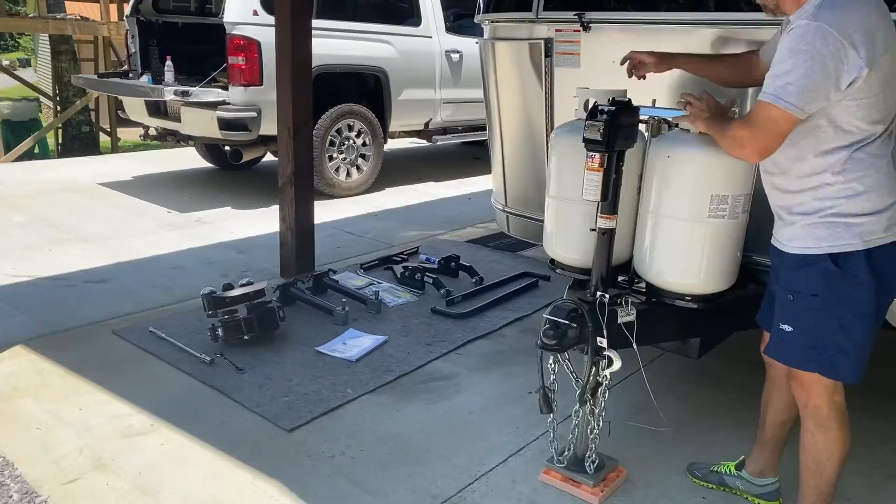Okay, now that you got the propane cylinders removed, this is a good opportunity to fix any chips in the paint, fix any rust, or repair anything that needs to be repaired on the tongue before we start. Being that this is a brand new trailer, it's in good shape, so we don't have to worry about doing any of that. But what we will do at this point is we will establish our measurements that the manual requires us to have on the tongue so that we can do the installation.

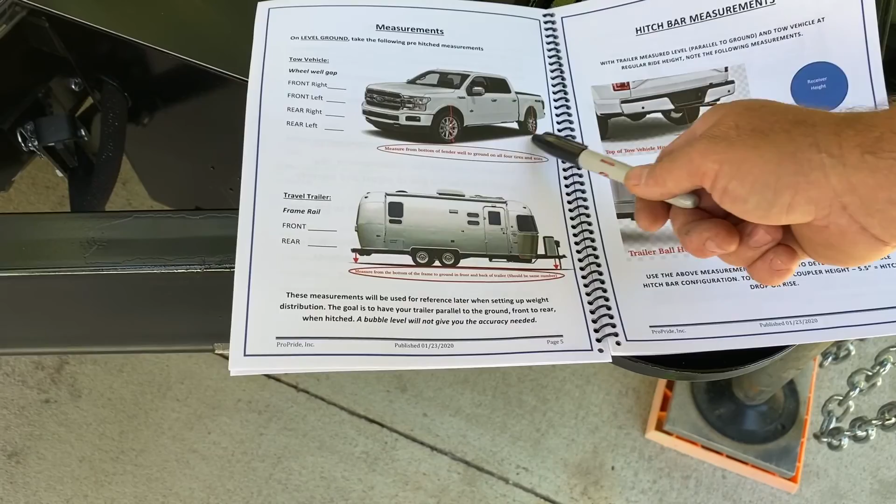Okay, one of the most important things to the installation is to make sure that we get all of our measurements. We're going to need to get measurements on the truck and on the trailer. We'll measure from the back of the trailer, front of the trailer, make sure we're level, and we need to get wheel height all the way around. And it gives us a place in the manual to write all those measurements. So we'll need a tape measure. I'm going to use a Sharpie Magic marker and some blue painter's tape in order to make our marks and give us a place to write those.

We'll also need to get the hitch box height and the trailer ball height so that we can establish the difference between the two in order to set up the stinger bar. So we're going to do that now. We're going to get the measurements off the truck and the measurements off the trailer, but we'll start with the truck.

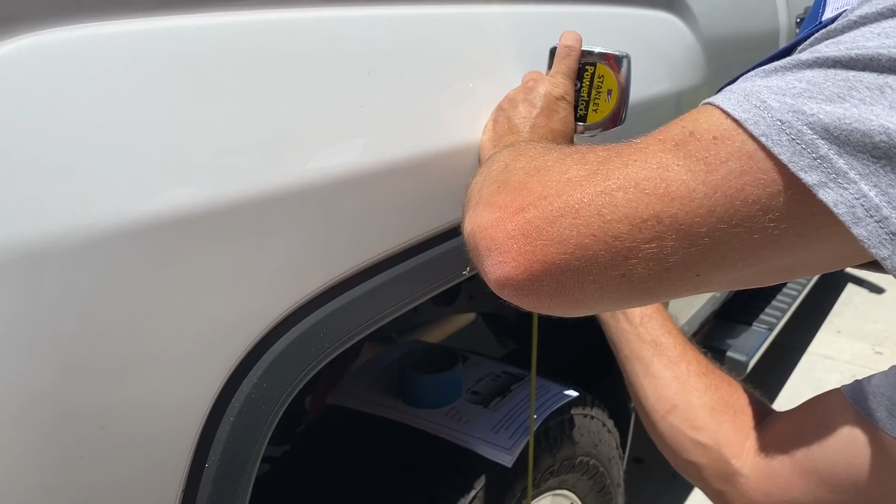All right, so what we're going to do is we're actually going to put a piece of blue painter's tape on the truck, and we'll use that to write our measurement on and a line so we don't have to remember anything. So we're going to measure from level ground to a mark on the truck, and 46 inches. That's what we'll use for that one.

These measurements will be used to set up the weight distribution portion of the hitch after the hitch is installed. We'll be able to tell how much the back of the truck goes down versus how much the front of the truck goes up, so that when we add the weight distribution to it, we can readjust it to get these numbers back as close as we can.

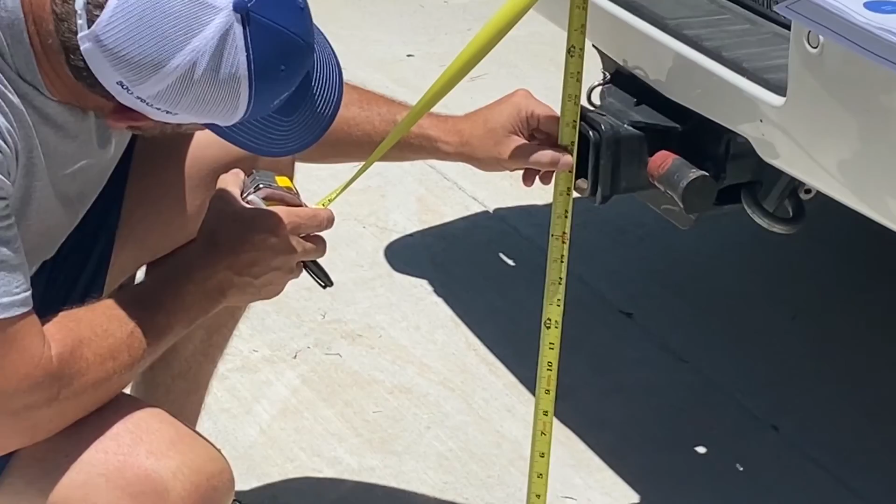All right, we're also going to need to get a measurement from the ground to the top of the hitch receiver here. So we'll take a tape measure from the ground to the top of the hitch receiver, and that measurement looks like it's 20 3/4 inches. So we'll take that and record that measurement in the manual here. It's 20 3/4 inches.

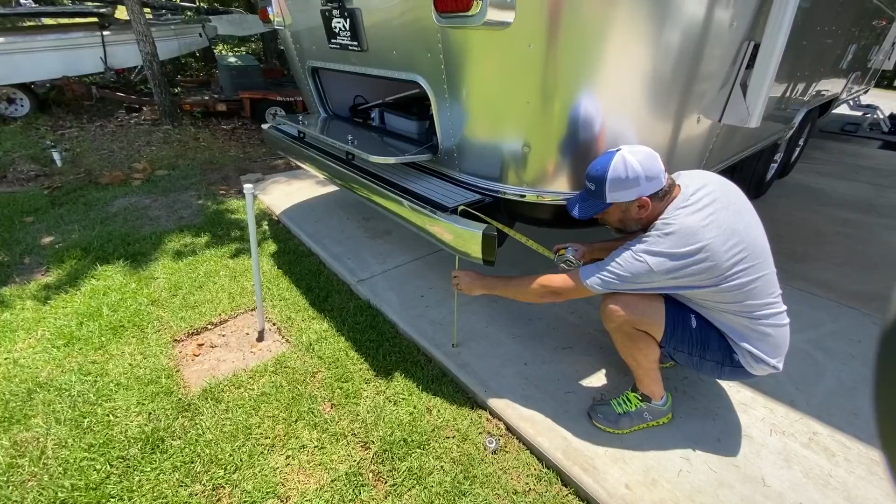Okay, next we need to make sure that the trailer is level. The way we're going to do that is we're going to establish a measurement from the bottom of the frame in the front of the trailer and the bottom of the frame in the back of the trailer. So we'll measure from the ground to the bottom frame edge is 19 1/4 inches in the front. And we'll go to the back and we'll make that measurement again. All right, we're going to check that measurement in the back from the ground to the bottom of the frame, and we have 19 1/4 inches. So those match. That means the trailer is level.

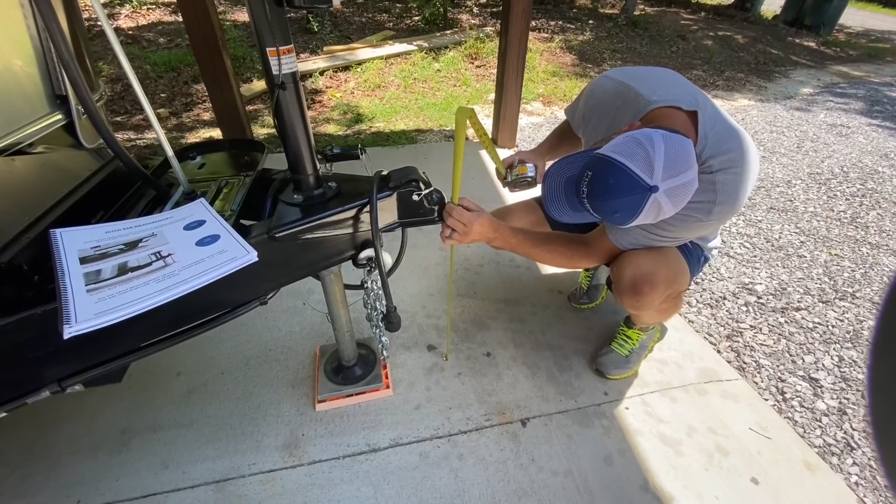Okay, so to establish the measurements for the hitch bar, we've already established that it's 20 3/4 inches from the ground to the top of the receiver. Now we need to measure from the ground to the top of the ball to get the trailer ball height. All right, so from the ground to an eyeball level spot, the top of the ball is 23 inches. So our ball height will be 23 inches.

All right, we're going to talk about the hitch portion of the ProPride setup. A lot of people get hung up on setting up this hitch bar, and it's really not that hard. There's a little bit of math involved in it, and you got to make sure that you've got good measurements to do it. But the first thing let's establish is which holes we use in this bar. This is the hitch side of the bar.

This is the part that actually goes inside the truck, and it can be installed either this way or this way based on your measurements, and that would be considered plates down or plates up. So then what you have is you have two pivot holes and you have two pivot pin holes.

And the way this works is this pivot pin, they recommend starting with 2 washers on it. This pivot pin will always go in the top hole. So if you're installing your hitch with the plates down, it would go in this hole. If you were installing it with the plates up, it would go in this hole. This pin here always goes in the top hole.

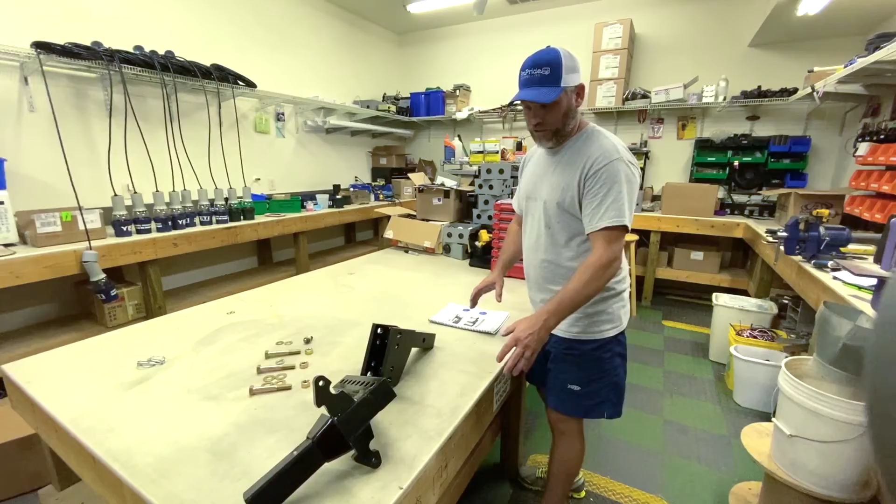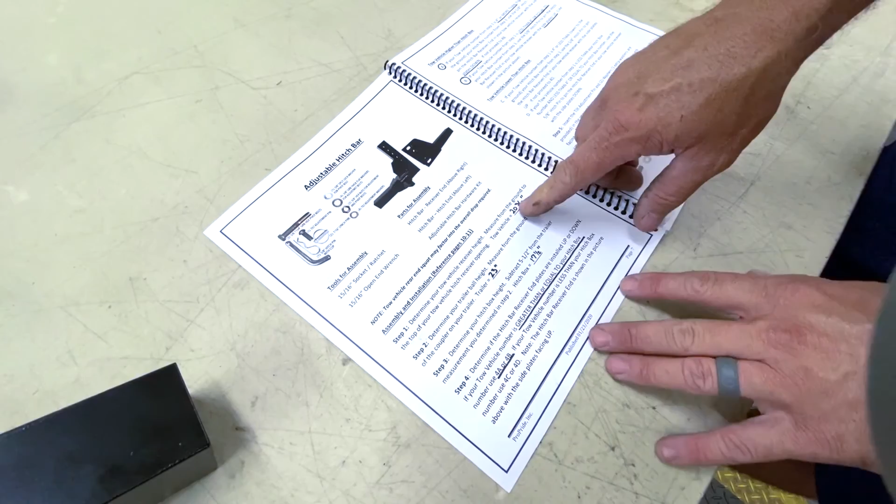Okay, so now we're going to use the measurements that we took earlier to determine whether we're going to install our hitch receiver side with the plates facing down or the plates facing up. So let's look at these numbers. We've established that our hitch height for the truck is 20 3/4 inches and the trailer ball height is 23 inches. And they give us a nice worksheet to work off of here. It says you determine your tow vehicle receiver height, which we have at 20 3/4. We determine the ball height at 23.

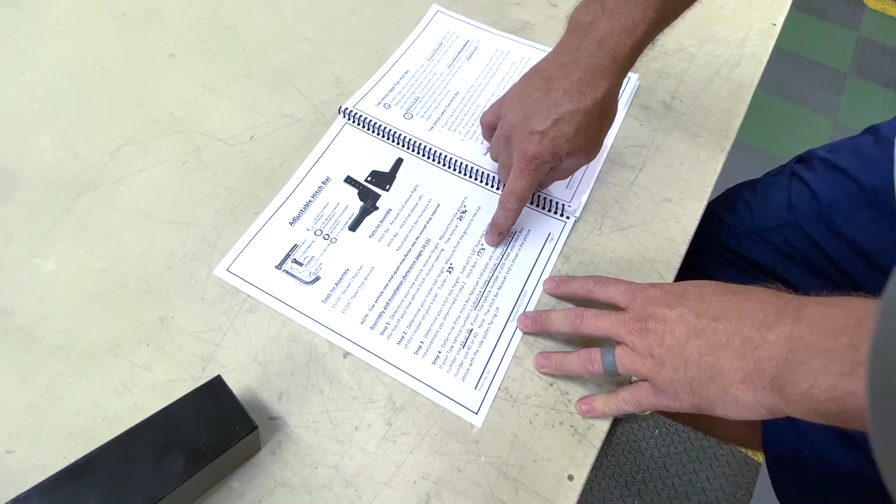The hitch box height for the actual ProPride receiver head is 5.5 inches lower than your trailer ball height. So we'll need to subtract 5.5 inches from the 23 inches and we get 17.5 inches. And then we're going to determine whether that number is greater than or equal to our hitch box height or less than. In our case, our hitch height is 20 3/4 inches. The hitch box height is 17.5, which means we are greater than or equal to the hitch box number. So then we're going to use steps 4A and 4B.

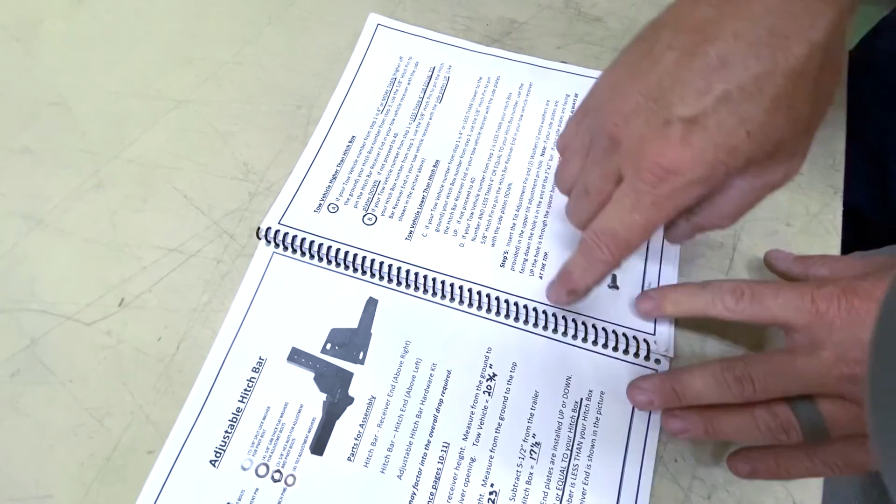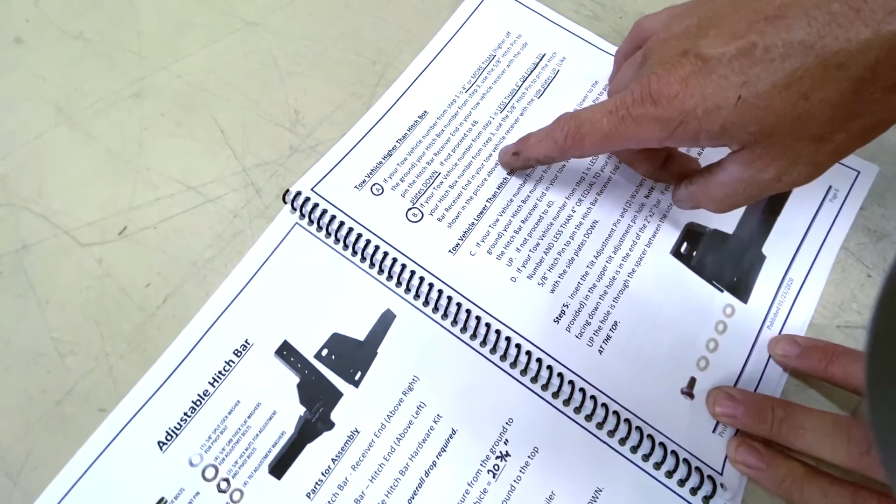So we come over here, this is step A, and it says if that difference in the number is 4 inches or more, then we're going to place them with the plates down. If it is less than 4 inches, we're going to install it with the plates up. So if we subtract 17.5 from 20 3/4, we get a number of 3 1/4 inches. So 3 1/4 inches is less than 4, which means that we're going to install our plates in the up position.

Okay, so we've determined that we need to install our hitch receiver with the plates facing upward. So I've kind of got it mocked up here how it's going to go, and what we're measuring is that 3 1/4 inch difference. From the top of the receiver we're going to establish a straight line here and then to the top of the stinger. We want to check it, and we're right at 3 1/4 inches there. So these would be the holes that we would use.

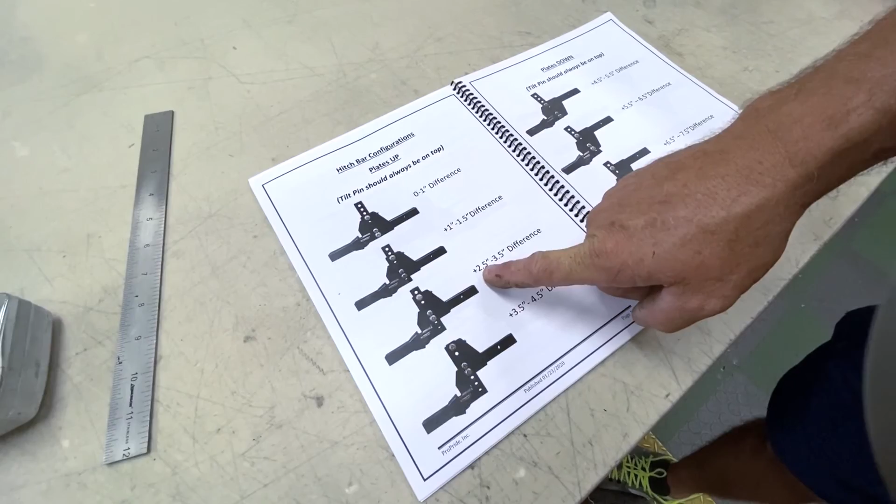Now this can also be established by a guide ProPride has given us, and we knew our difference was 3 1/4, which falls between 2 1/2 and 3 1/2. And if you look, the picture will show you exactly where the bolts go. So it looks like ours is plates up with 1 hole exposed at the top.

Okay, so let's install these two together. So again, remember, this pivot pin always goes in the top hole. We're installing ours with the plates up, therefore the pin goes in the top hole here. Now, we'll slide these together. The pivot bolt goes in the bottom hole. And we're going to slide it up so that we get our 1 hole exposed here at the top. And then we're just going to put it together.

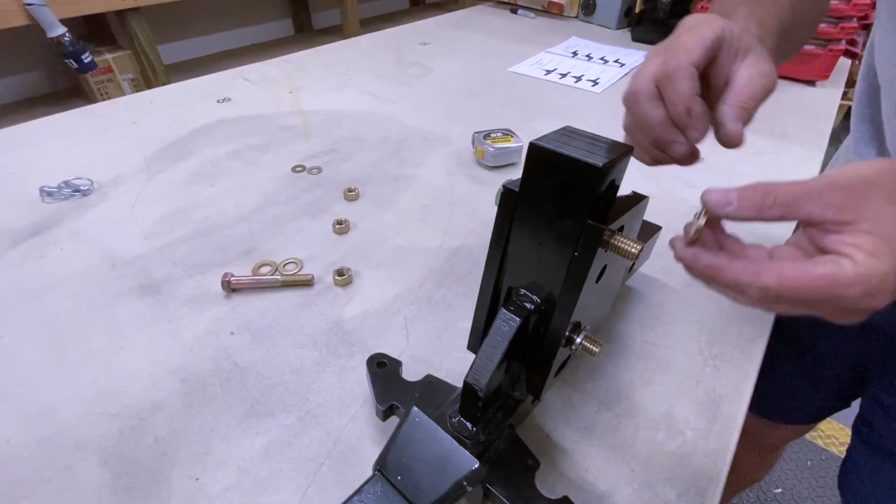There's a washer that goes on this side. A washer that goes on this side. And then the nut. There. And then the bottom hole. There's a washer that goes on this side. A washer that goes on this side. And then the nut. Okay.

I'm going to show you what this pivot pin does. When we apply weight distribution to the hitch, it'll stop the hitch from continuing to pivot upward. So this can be adjusted to change the angle of the stinger. But right now they recommend 2 washers, so that's what we've got in there. So we'll get all of this tightened up, and then we'll be able to put this in the back of the truck and determine if the stinger is level with the ground or not.

If it is aiming in the down position, we would need to take a washer out. If it's in the up position, we want to push it back down. We may add a washer here. But this is just a rough guideline to get started. We use 2 washers.

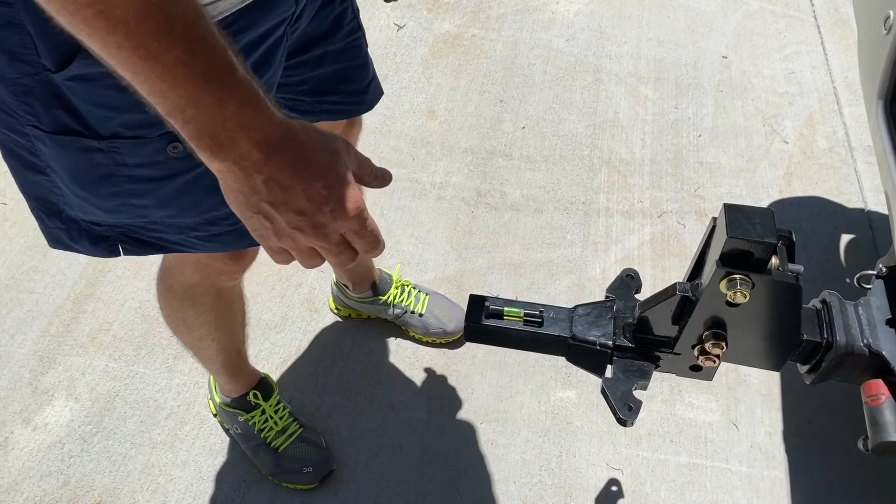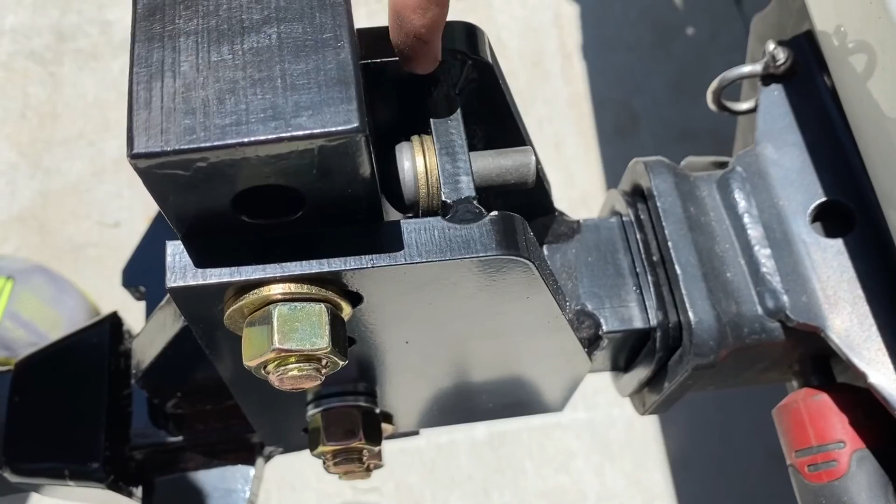Okay, so once the hitch is on the back of the truck, the ultimate goal is for this stinger to be level. So what you'll do is if you pull up on it, it should be close to level at this point. And that would be where these washers that are on this pivot control pin here come into play. The number of washers you have there will affect the angle.

So right now we're going to leave it where it is. We may need to fine tune adjust it later, but it's close to being within the lines. I don't think the truck sits level without any weight on it anyway, so we'll have to look at it once we get everything in place and see how it looks.

Okay, let's do a recap of what we've done so far. So we've established our measurements all the way around the truck. We've established our measurements on the trailer, establishing the hitch height, establishing the ball height, using the manual to calculate our measurements to determine where we needed to be as far as mounting the stinger to the hitch assembly. We've got that done.

We've got everything snugged up. It's not super tight at this point, but it's firm enough that it won't move. We'll tighten everything else up once we make final adjustments. Okay, so now what we're going to do is go back over to the trailer and we will mount the weight distribution jacks and the frame bracket.

Okay, so we're going to establish the measurements for the weight distribution jacks, which will mount to the frame. That measurement is 26 inches along the A-frame from the center of the ball to our 26-inch mark. We'll have plus or minus an inch and a half. So there's a 3-inch window where that jack can go.

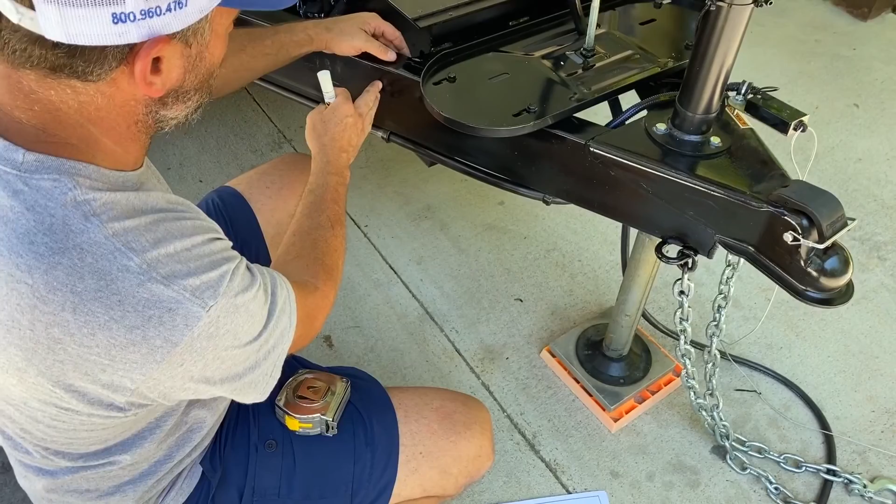The reason it needs to be within that 3-inch window is because you want it pulling straight up and down on the weight distribution spring bar when you raise or lower it. You don't want it way back here where it's pulling at an angle, or way up here where it's pulling at an angle. So what we'll do is we'll establish the 26-inch mark here, and then we'll have to determine where it falls in line with our propane tank cover to make sure we don't have any interference between the jack and the cover. So let's get our mark here.

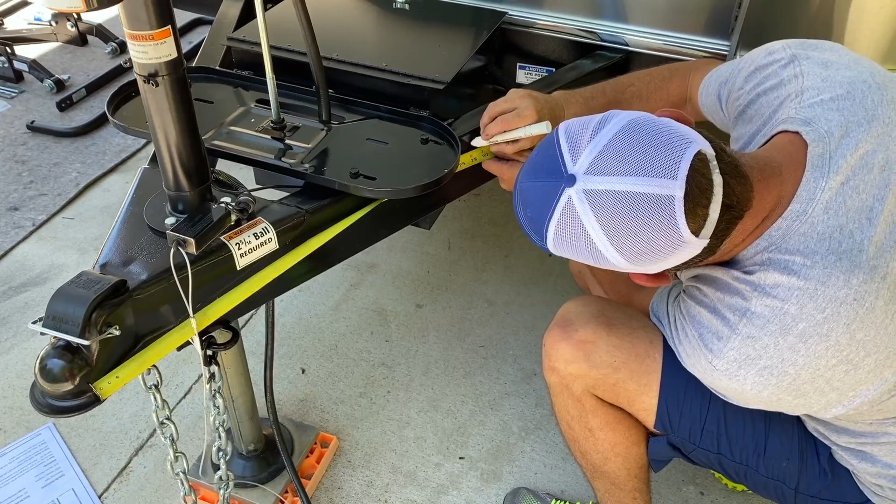We'll find the center of the ball. We'll come back to 26 inches. Make a mark, and then we're going to go to the other side of the trailer. Do exactly the same thing, finding the center of the ball. And 26 inches.

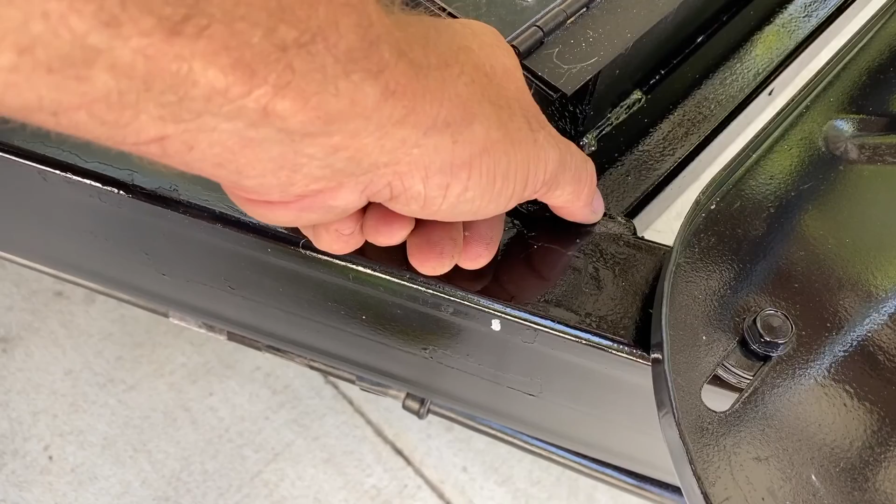Okay, so we've established our 26-inch mark here, and I can already see we're going to have a little bit of an issue because the cross member for the battery box falls within that 26-inch mark. But remember, I said we had plus or minus an inch and a half, so we can go an inch and a half back. Obviously, we can't go an inch and a half forward because we'll be in the propane area. So we're going to grab one of the jacks, put it on here, and try to establish where our mounting point will be, keeping it within the inch and a half margin, and then we'll check for interference with the propane cover. So let me grab a jack and we'll look at that.

Okay, I've got one of the weight distribution jacks here, and it's saddled over the A-frame. And what I've determined is that I am going to have to come back to the 27.5-inch mark, which I've marked here. That's an inch and a half behind the 26. And what you're measuring to is this leading edge of the jack, the very front edge.

So if we slide this jack to that 27.5-inch mark right there, I've determined that we can mount it here, and won't have any interference with the propane cover, and we're within our 1.5 inches of play that we have for the jack.

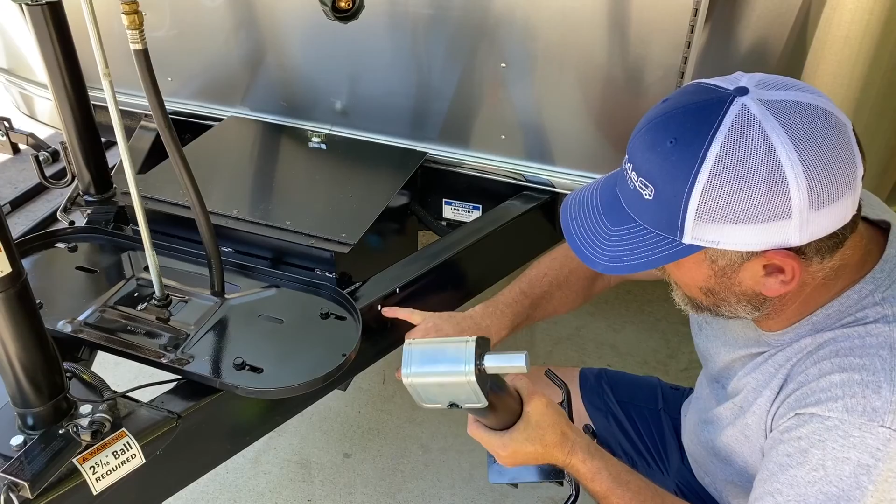Okay, so what we've done on this side is we've established this is our 26-inch mark, which is the factory mark they told us to, or the standard mark. And then we have an inch and a half in either direction. Obviously forward we can't go. We're going to have to go backwards to allow clearance for this bar and for the propane cover.

So what we'll do is we'll simply saddle the jack over and have it right on the 27.5-inch line there. Now these measurements will vary trailer to trailer. This is my Airstream, and these are the numbers I'm having to use. You may have other things in place. A battery box may be different, may not have a battery box here. Propane may be in a different spot too, but for us, we're within the 1.5-inch margin they give us, and we've got good clearance for everything.

Okay, so we just did a quick mock-up. We put the propane cover back on and mounted the weight distribution jack. Here we are at our 27.5-inch mark, and you can see we've got plenty of clearance for the cover there. I think this will work, giving us plenty of gap between the propane cover and it. So that's where we'll mount them, is there.

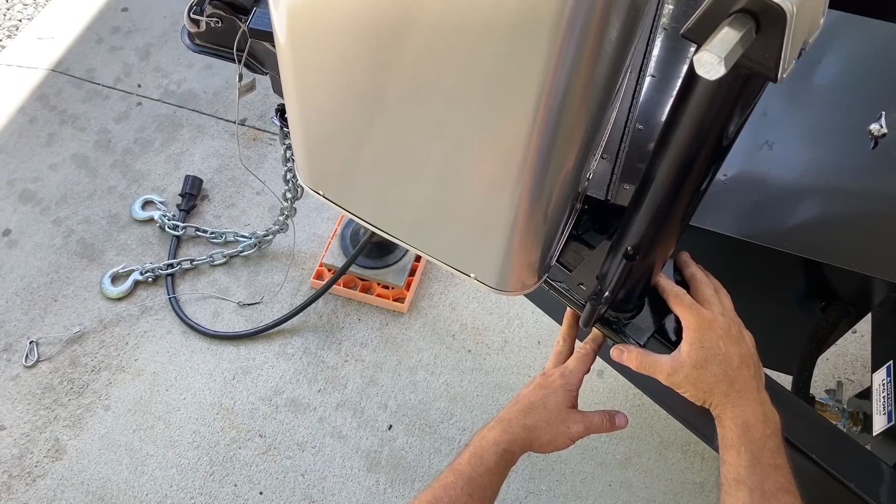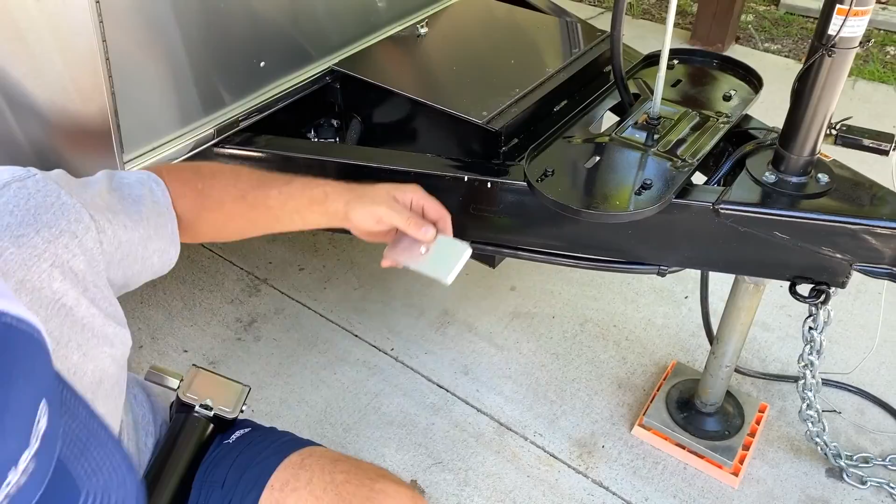Okay, so these weight distribution jacks will mount to the A-frame using a U-bolt. That's how it works. But they also provide you with a spacer plate that needs to go in here. And this is because there's different thicknesses of trailer frames, and for ours it'll require that we use this spacer. It'll go on the inside of the A-frame and give us the space that we need between it. They also provide you with some long bolts and short bolts.

These long bolts are for if your trailer has a C-channel type frame, and the short bolts are if it's a solid tubular frame. Ours is a solid tubular frame, so we'll use the short bolts, but what we will do is we will use the nuts off of the long bolts as a jam nut to prevent these from coming undone once installed. So this goes up like that, and then we'll put this bolt in here, and it will go through the shim and tighten against the frame. And these just are snugged up, and you give it a quarter turn, and then the U-bolt will hold everything in place.

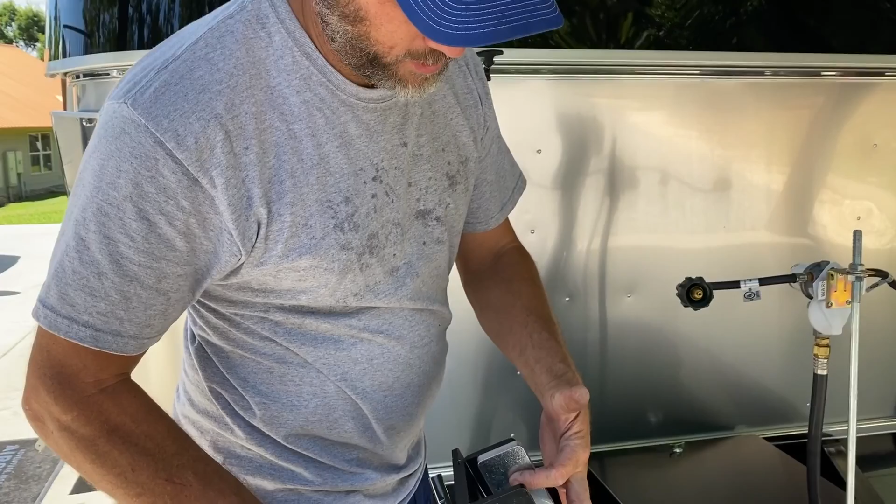So we'll go ahead and mount the spacer in position. We've got the nut in place. So this thing should fit nice and snug. What we want to do is just be careful. Try to slide it to our 27-inch mark and lock it down into position. There.

Okay. All right, so now that we've got the weight distribution jack in place, we're going to tighten this bolt in the back. And again, it is just snug it up and then give it a quarter turn to get it good and tight. So we'll make sure we get it good and finger tight there. A little tighter in there. Okay, there it is. And quarter turn. All right, good deal. And then I'm going to tighten up this jam nut on the back that we added, which will add a little bit of locking potential to that bolt so it doesn't move.

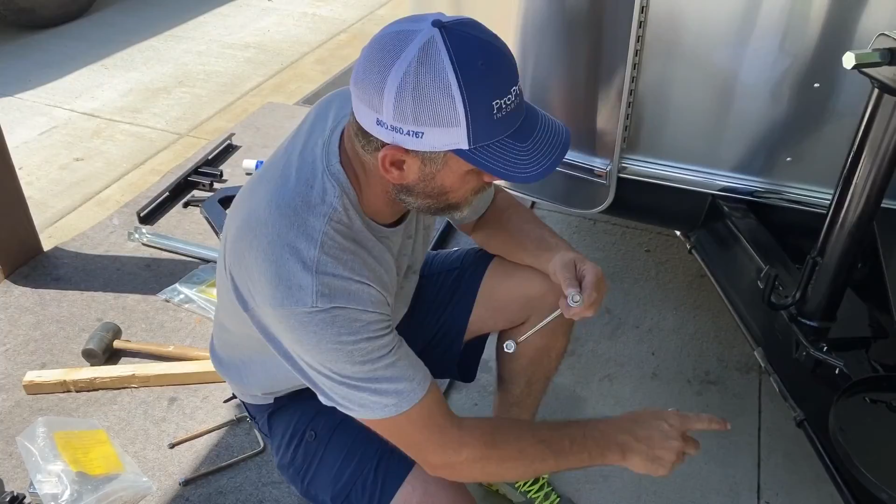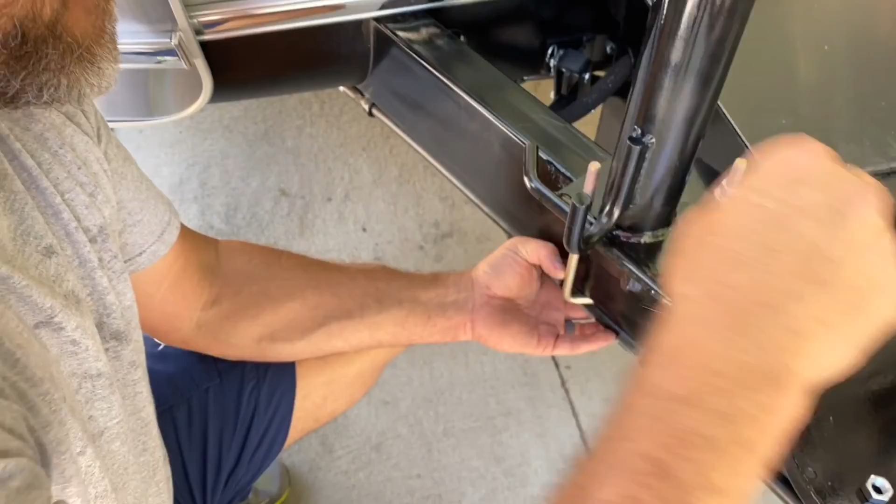Okay, so that's done. Now we'll need to mount the U-bolt. You may notice here I have a propane line coming down the bottom of the A-frame. It's not a major issue. We should be able to go under that propane line like so, and come up through just like that. And then you've got a washer and a lock washer and a nut on this side. And the same on the other side. We'll have a washer, a lock washer, and a nut.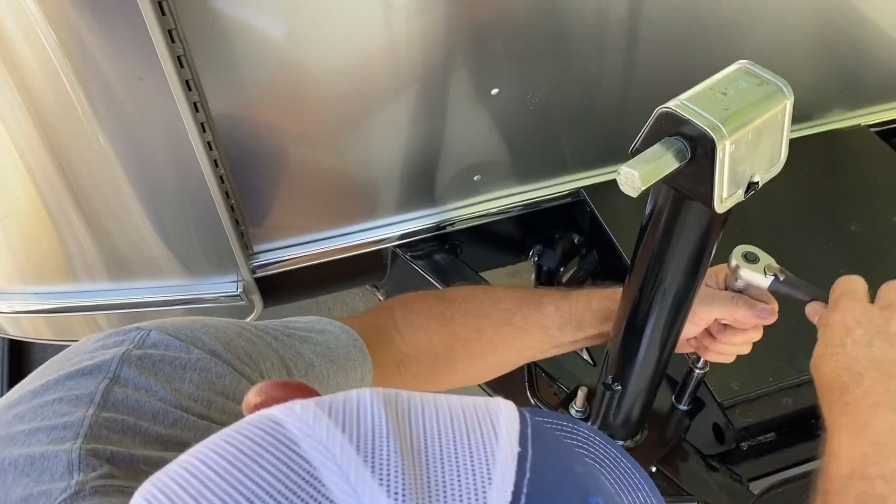Got it. All right, so once the U-bolt is hand tight, we're going to tighten it with a 9/16 inch deep well socket. The manual says don't put any more than 30 pounds of torque on these because you don't want this U-bolt to bend under the bottom of the frame. So basically the weight of the spring bar pulling down on it holds it in position, so you shouldn't have a problem. So what you want to do is just tighten these up until they're good and snug. Just kind of feel it. That's there.

Okay, now what we're going to do is do the same thing with the other jack on the other side. Some paint gets inside the threads on this thing, so it's kind of difficult to get this bolt going here, but it does go. It's just paint in the threads. Make sure the shim is straight.

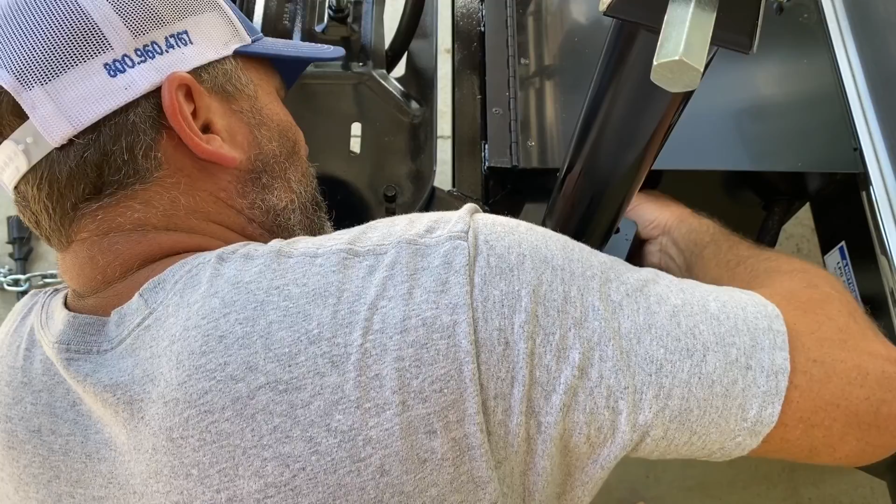And again, it's just finger tight and a quarter turn. That's all you're trying to get on it. We're going to give it about an 1/8 and about an 1/8, and that's it. And we'll tighten that swedge nut up. And it gets a little bit more. So it'll go up to there. Kind of put a little on that one.

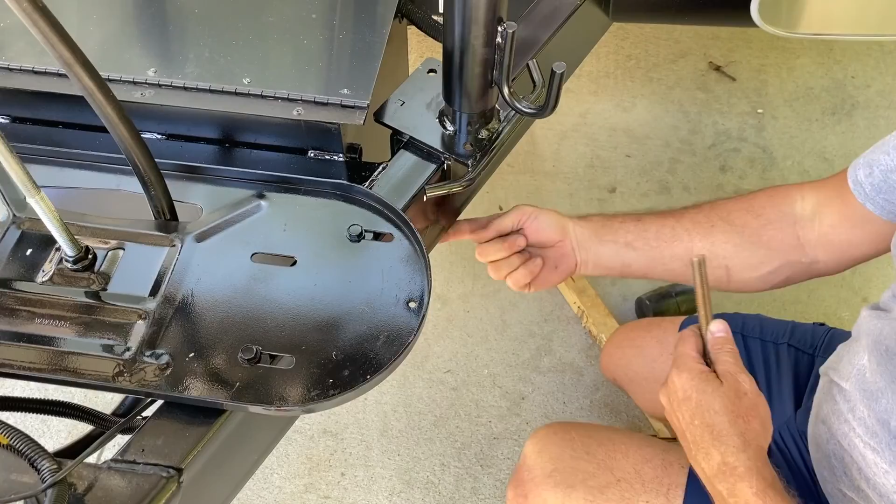All right, and then the same scenario with the U-bolt. Take all this off this side. We don't have a propane line to deal with on this side, so it's a little bit easier to kind of slide the U-bolt up through. And then we'll grab a washer, lock washer, and a nut. Oops. And then a washer, a lock washer, and a nut.

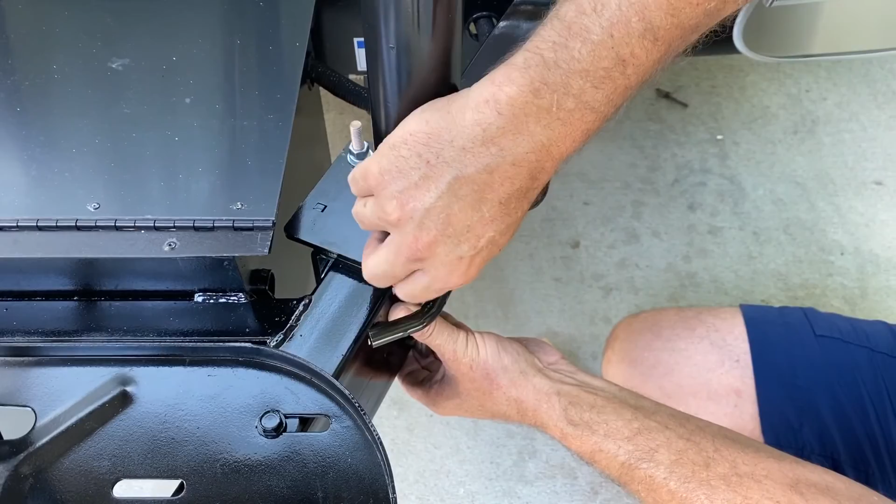And then again, these are tightened down with a 9/16 inch deep well socket, and they don't need any more than 30 foot-pounds on them because you don't want to bend the U-bolt around the bottom of the frame. Something just to remember too, these are our marks. The mark is for the leading edge of the jack. So we're marking it and we're making sure they're in place there.

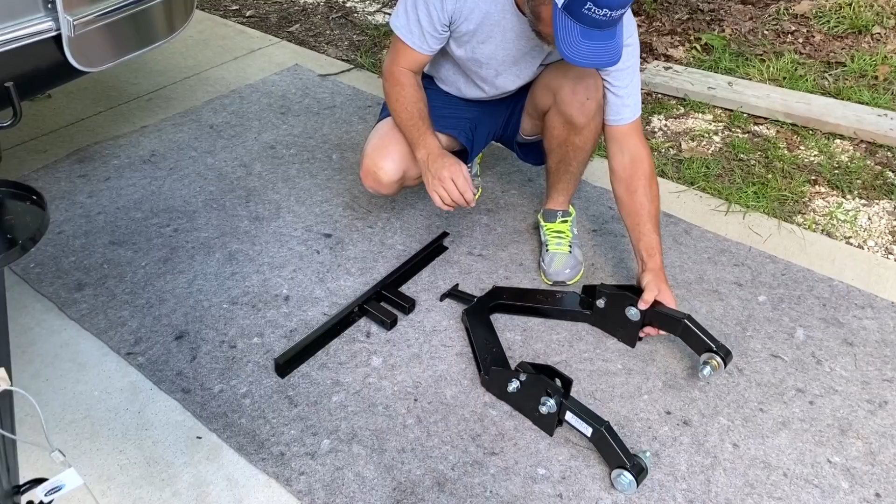Okay, now we're going to talk about mounting the frame bracket. This is the yoke part of the hitch. This is kind of what makes ProPride unique from the other brand. The other brand uses a torsion bar type deal to secure the hitch head to the trailer and prevent it from pivoting. ProPride uses this yoke, and this mounts to the pivot, to the hitch head, and locks it in place, preventing it from turning on the ball.

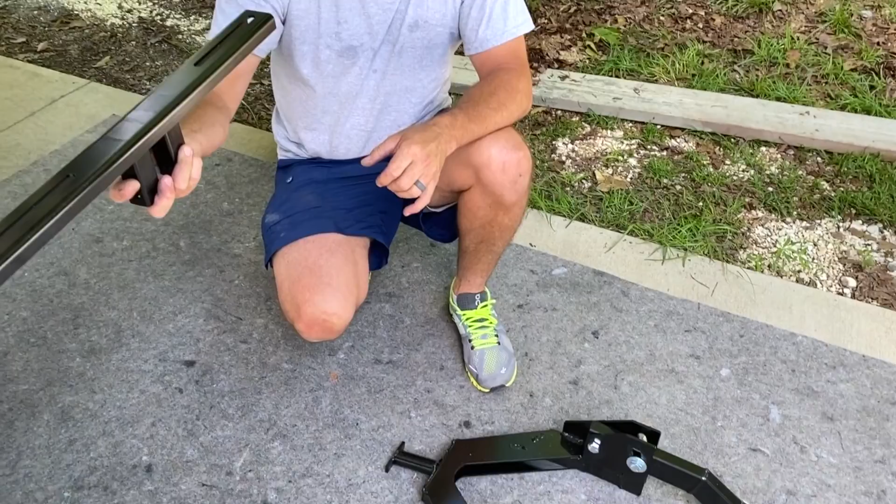This prevents it. The way it does is it would try to turn this way, and then this frame bracket will go under the frame and sit like that, and that will prevent the yoke from being able to turn. So we're going to mount this to the underneath side of the frame next. So we'll get right to that.

Okay, so in mounting the frame bracket, we'll do the same type measurement we did for the weight distribution jacks, but the measurement is 22 inches. So we will measure from the center of the ball along the frame rail to 22 inches. Okay, so we established a 22-inch mark. I'm going to use a square to transfer that mark to the bottom of the frame edge here, so we can have it. And then we'll have to do the same thing on the other side.

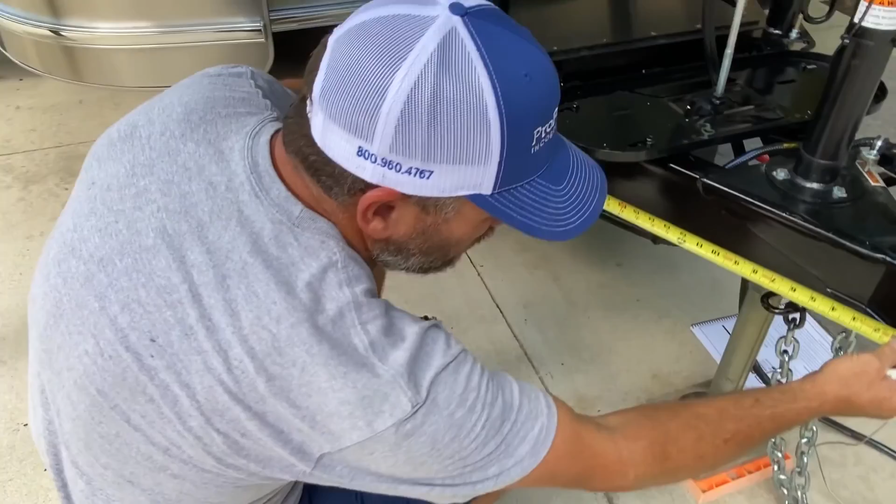We'll come around over here, and we'll measure from the center of the ball to 22 inches. Take a square and transfer that mark to the bottom of the frame. The tolerance for this measurement is a 1/2 inch.

So what we'll do when we mount the frame bracket underneath is we will snug it up, but we will not torque it or tighten it up completely, because we won't have the final position of it until the hitch head and the yoke are in place. So these are just going to get us in the general area, and then we'll be able to adjust it once the yoke is mounted to the hitch head.

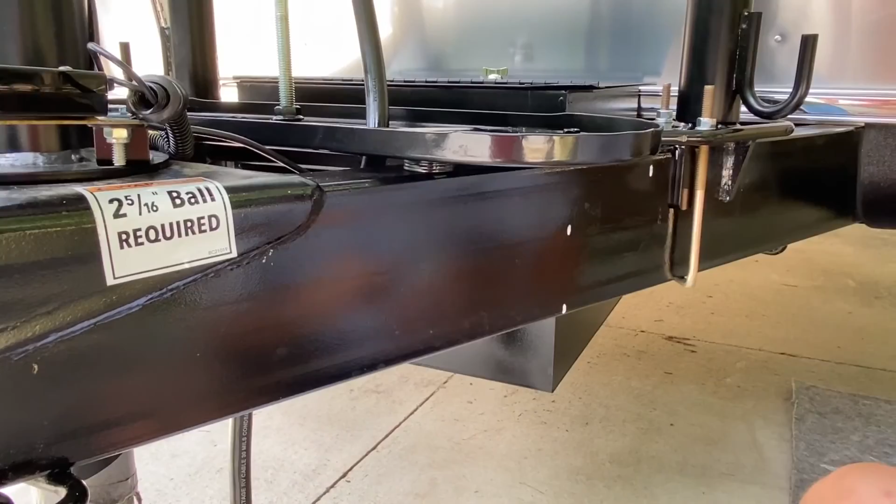Okay, so the frame bracket is actually mounted to the bottom of the frame and it's going to be held in position with U-bolts. Our propane tank tray was mounted to the top of the tongue here. It was down, it was flush. So you had two options. One would be to remove and raise the propane tank tray so that the U-bolt would fit under it, or it would be to drill holes through the propane tank tray, allowing the U-bolt to pass through and bolt it down.

We chose to raise the propane tank tray, and the way we did that was there's 4 bolts that hold it in place. I removed these 4 bolts and I added spacer washers underneath, and I did this previous to the install in interest of time so that I could actually paint all of this and it would be dry through the installation process.

So the way it's going to work is we're actually going to take this U-bolt and we will slide it under, and then it will come down like so. So there's a gap between the propane tank tray and the A-frame of the trailer that allows that U-bolt to pass through there now because of the spacer washers we added.

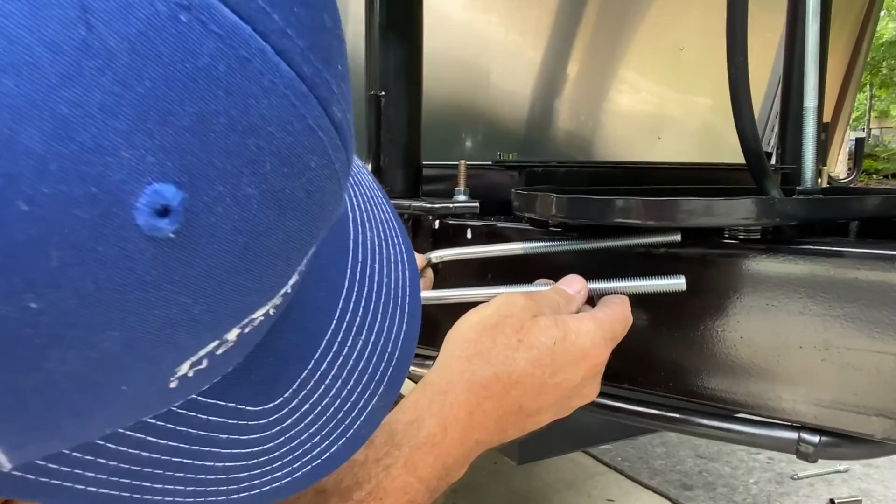Okay, same thing on this side. We're going to simply pass the U-bolt through the gap and it will fall down and be able to come back into position. We still got this pesky propane line to deal with, but I believe we'll be able to move it down and slide the frame bracket just above it, and it'll sit like that. So that's the plan.

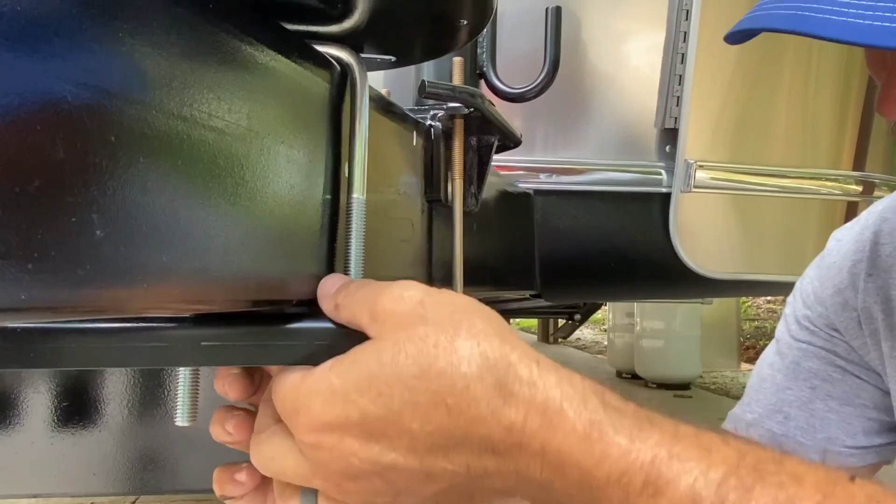Again, we're going to just finger tighten this thing up to the frame because we don't actually know its final installation position until the yoke is installed. And since there's only a 1/2 inch of margin forward to backwards, we don't need to tighten anything up until we make sure we've got it where we need it to be. So I'm just going to finger tighten it like that for now. Go to the other side and do the same thing.

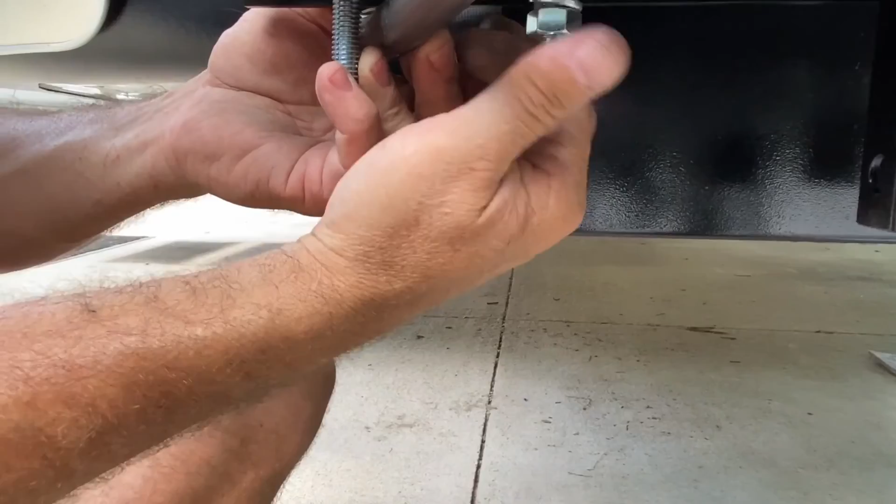Missing a lock washer. It's right there. Probably speed a lot of this up anyway, so. All right, that's that. Perfect.

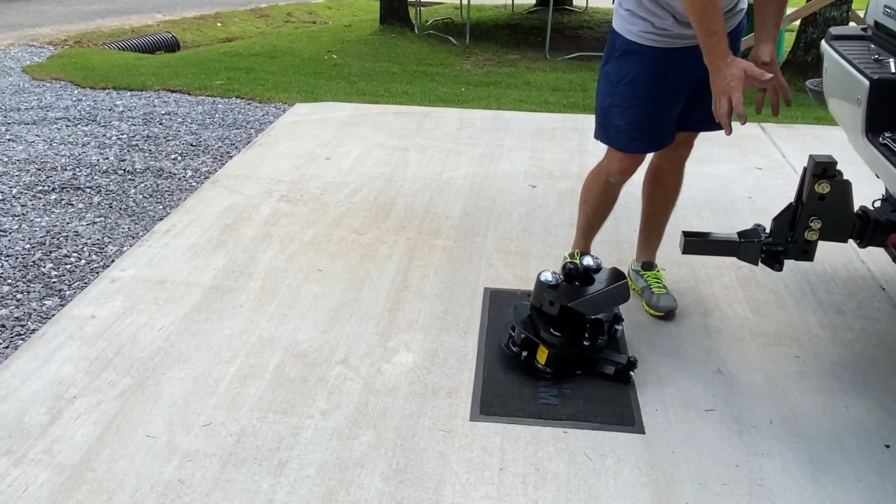Okay, we've got the stinger and hitch bar on the truck. We're ready to mount the main hitch assembly to the trailer. The way we're going to do that is I'm actually going to install the main hitch assembly onto the stinger bar, and then we'll back the truck up to the trailer, and we'll set the trailer on the ball just like you were hooking it up to a standard hitch, but this time we'll set it on the ball for the last time.

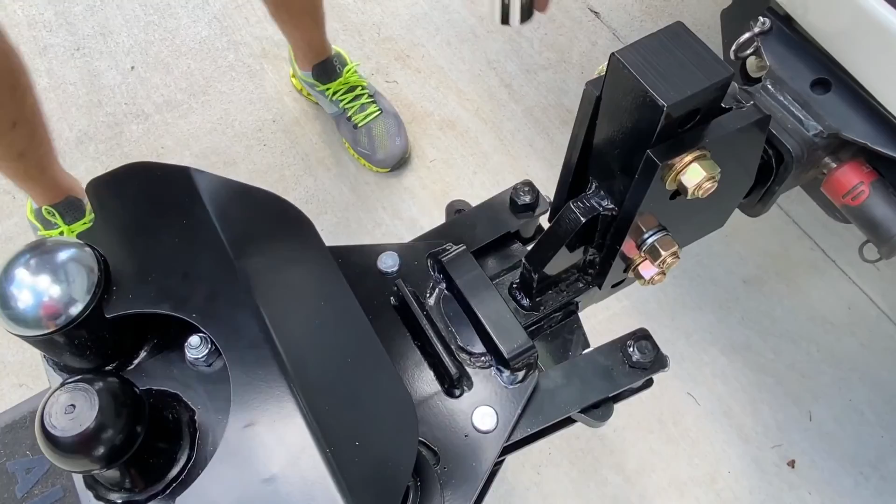So we'll get that set up, and I'm going to probably want to get some help for this part here, but I'm just going to manhandle it. It's not too bad. Just set it on there like that. We'll lock it on. And drop these in place. And there it is. It's all secure. So now we'll back up to the trailer and we'll set the hitch on the ball.

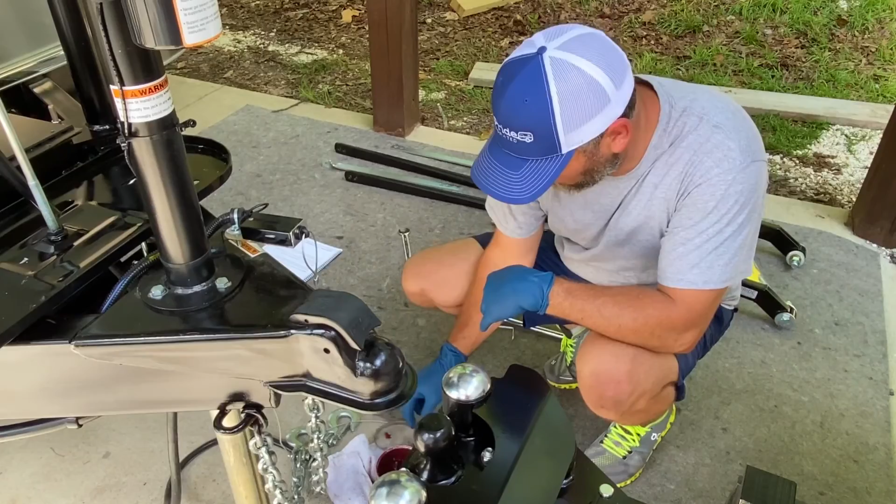So next step in the instruction manual is to grease the ball. Whoa.

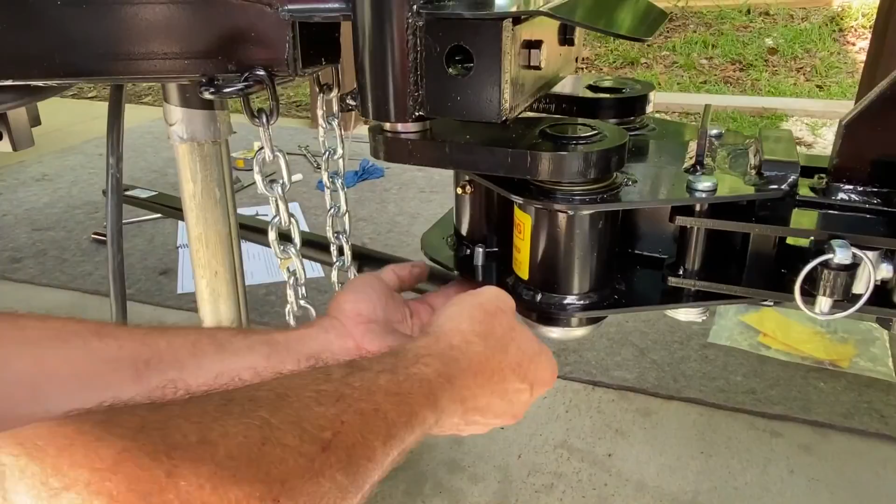After the trailer coupler is lowered onto the hitch head assembly, it's time to install the weight distribution spring bars. This is done by removing the retaining bracket, inserting the spring bar after it is greased, and then tightening the retaining bolt. Here you can see the weight distribution spring bar retaining bracket being removed.

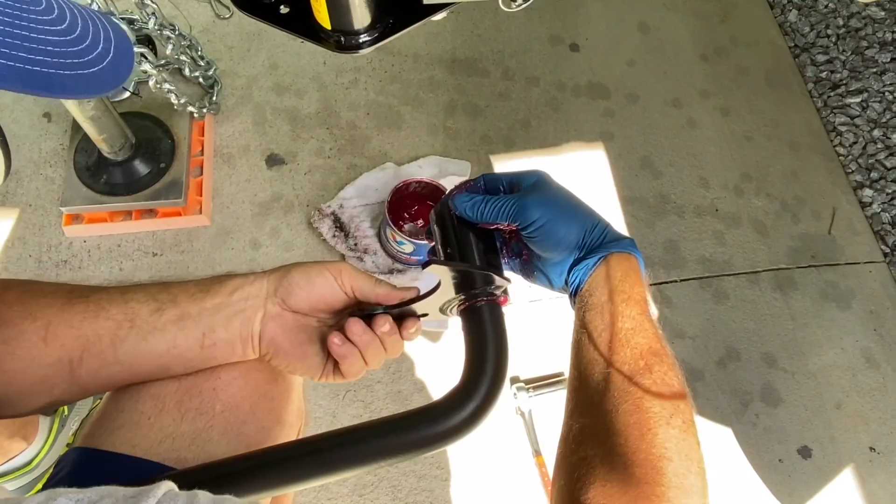You'll notice there's a small retaining disc that is used to hold the weight distribution spring into the retaining bracket. Insert that into the slot and then use a little grease to help hold it in place while you reinsert the spring bar into the bottom of the hitch head. That's it. You just tighten these up firm.

There are grease zerks on these things, so you can pump grease into them periodically as needed. But it's a good idea just to grease them before you get them in there. But there you go. Both the spring bars are installed.

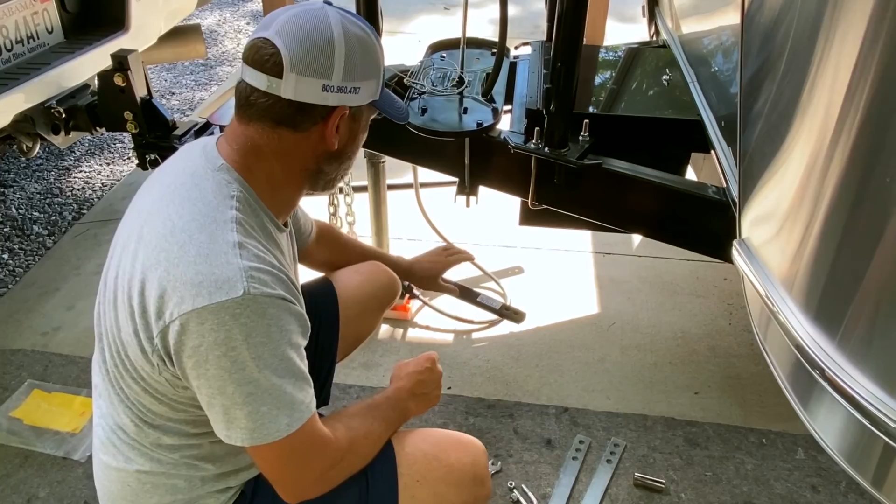Okay, now that we've got the weight distribution springs in place and we've got the weight distribution jacks in place, we need to put the weight distribution links in place. And that's these metal bars that link the jack to the spring, and they recommend that you start in the center hole. So we'll go center hole here, bring around, and you've got a U-bolt that goes through the

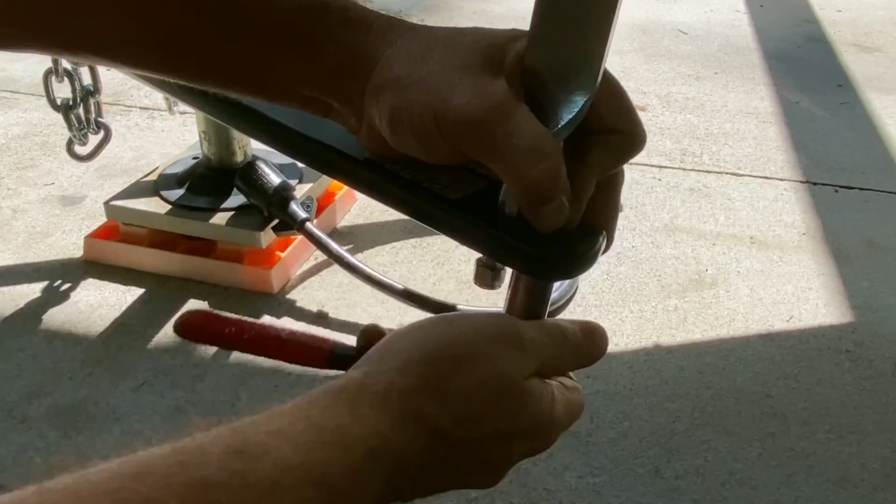spring there, and two nylon lock nuts that go on the bottom, and they just need to be tightened up to the point that the nylon is well locked in. Just so I can see a thread or two through the bottom is all I'm after. All right, so that one's secure. We'll go to the other side and do the same thing.

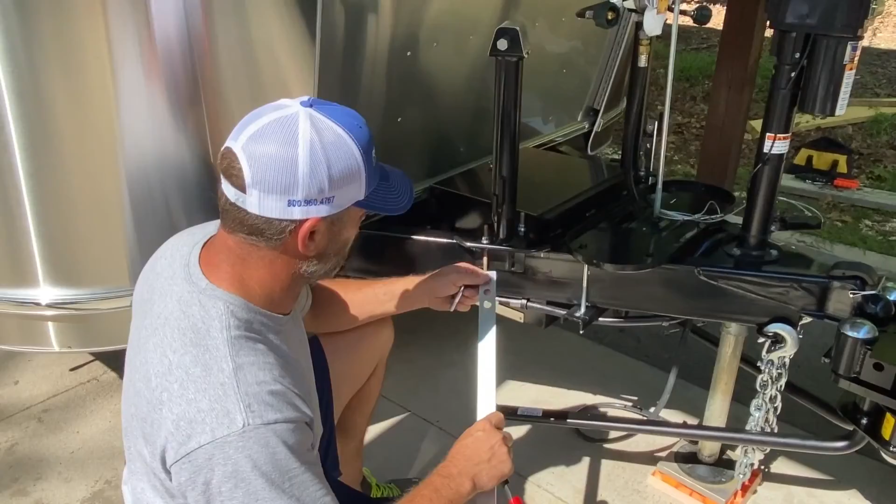Okay, so same thing on this side. Spring bar is connected. Weight distribution jack's connected. We need to put the link in between it. We'll go to the middle hole, swing it around. We have the U-bolt. Passes through there. I'll need to pass the U-bolt through the spring.

And then these nylon lock nuts, again, all we're trying to do is make sure we got thread coming through the bottom. So we'll start that one there. Start this one here. Just a second thread coming through the bottom there.

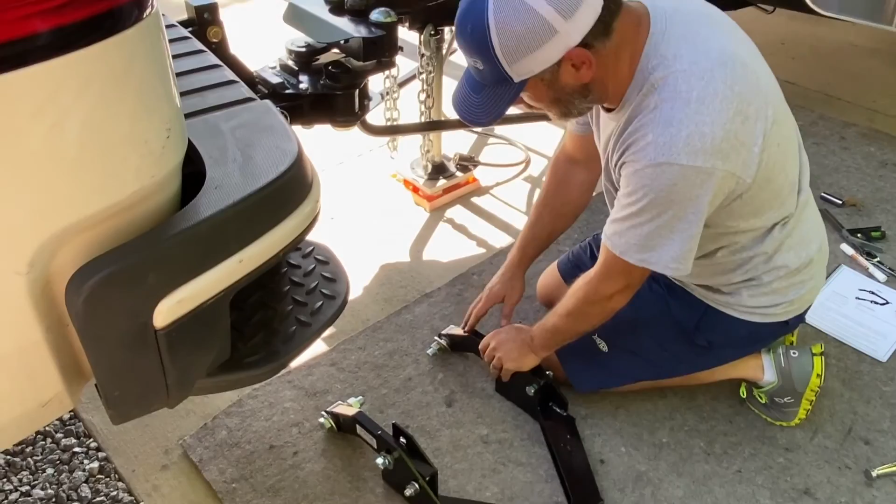All right, so the last piece we got to put on this thing is this yoke. We got to mount it. First thing we need to do is remove all of these 3/4 inch bolts, taking into account the orientation and order of the hardware, and leaving the bushing in place.

So we're going to remove the nut. You'll note we have a nut, we have a split lock washer, a washer, and then on this side we have a washer on the bolt head side. So we need to keep all of that stuff in order. Our space will be between the washers. There's a steel bushing with a brass follower inside there. That needs to stay in place.

Same thing on this side. And a washer. Split ring lock washer. All of those. And leaving the steel bushing in place.

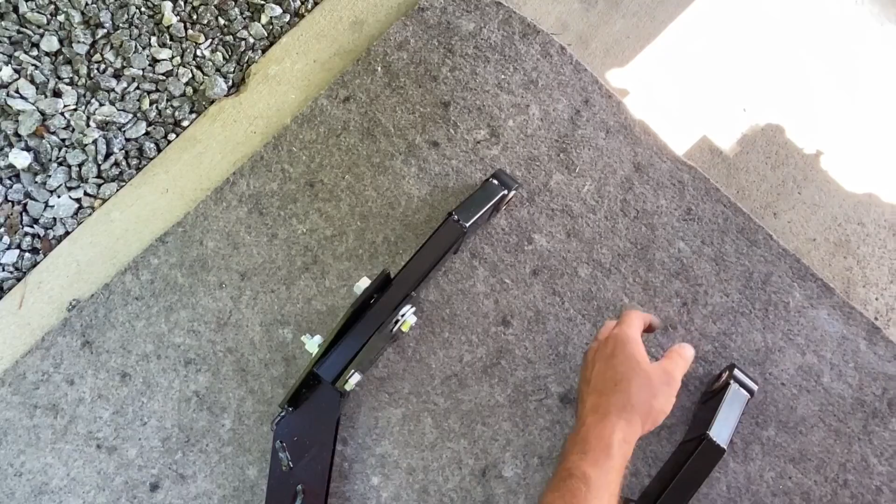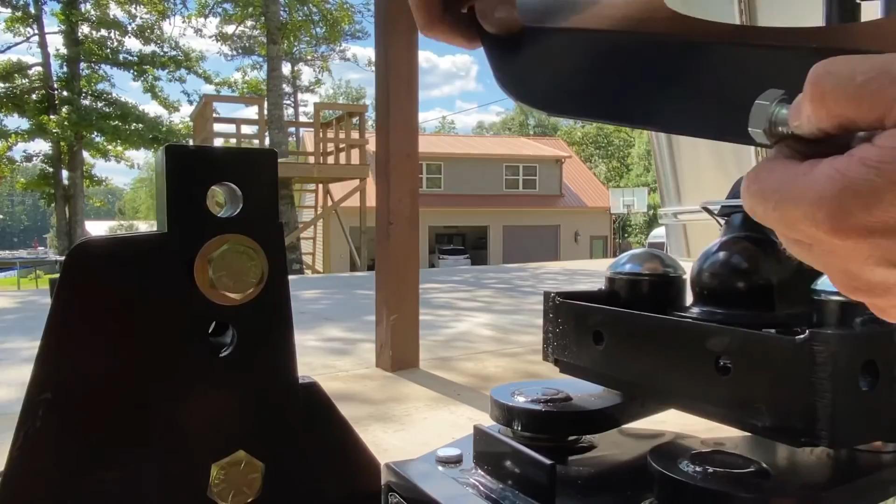There's a thing called a lot bar which allows you to drop your trailer off at an RV dealer and they can tow it with just a regular ball. You have to remove this plate in order to install a stop block. But right now we're just going to remove it, set it aside so that we can install the yoke.

Okay, so let's look at how the yoke will assemble to the hitch head. What you've got is a welded-in stop block here that will stop the nut from turning, allowing you to tighten the bolt.

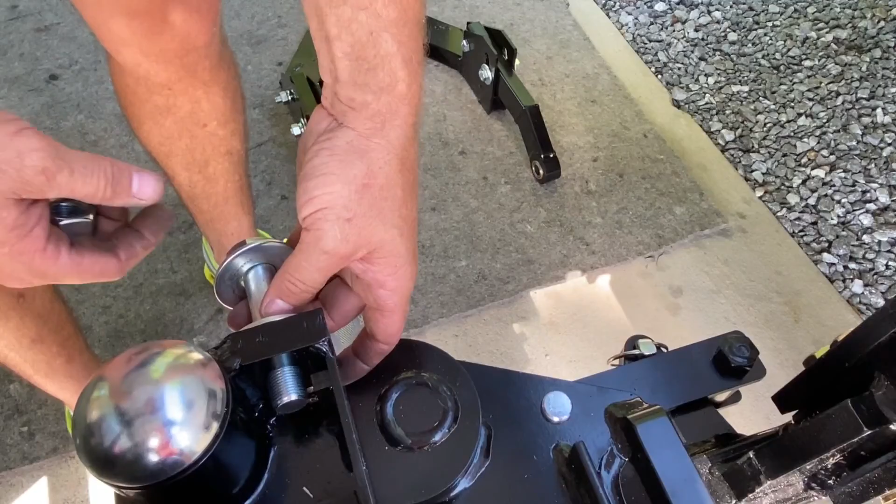How it goes together is, if you'll remember here, you've got your bolt head, there's a washer on this side, your yoke bushing will go between a washer, and that all goes on the outside of the assembly. Then you've got this lock nut that you've got to slide in behind this welded-on stop block there, and then this will tighten into place, and that will allow you to tighten that bolt without that nut turning.

All right, the next step in order to get the hitch aligned and get the yoke tail into the frame bracket is we're going to need to disconnect the truck from the hitch, and the reason is because right now we're at a slight angle and we can't turn the hitch head to get it to line up because it's still connected to the truck. So we're going to disconnect the truck.

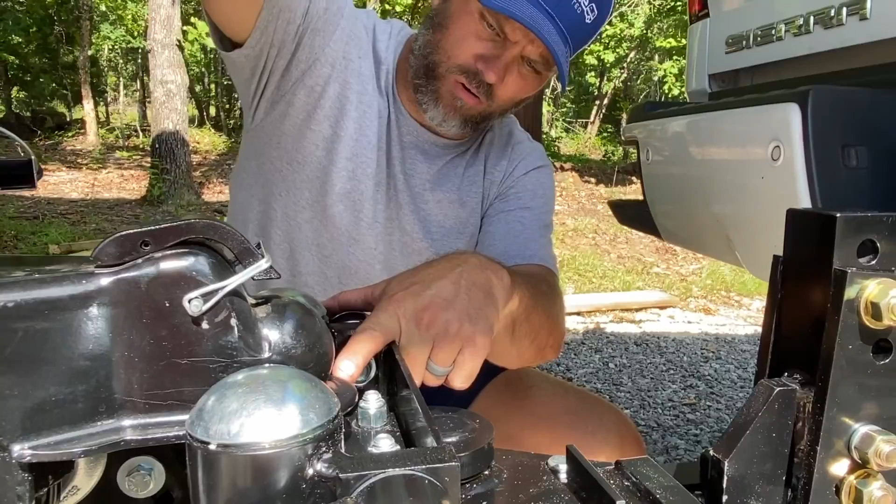The way you do that is you're looking for this slack right here. I'm going to raise it back up. You can see the ball coming up right here. But when you disconnect, what we're looking for is that slack. So we're going to let it come down, down, down. Watch it. There it went. You saw the hitch move. Do it one more time. Going down, you'll see the hitch.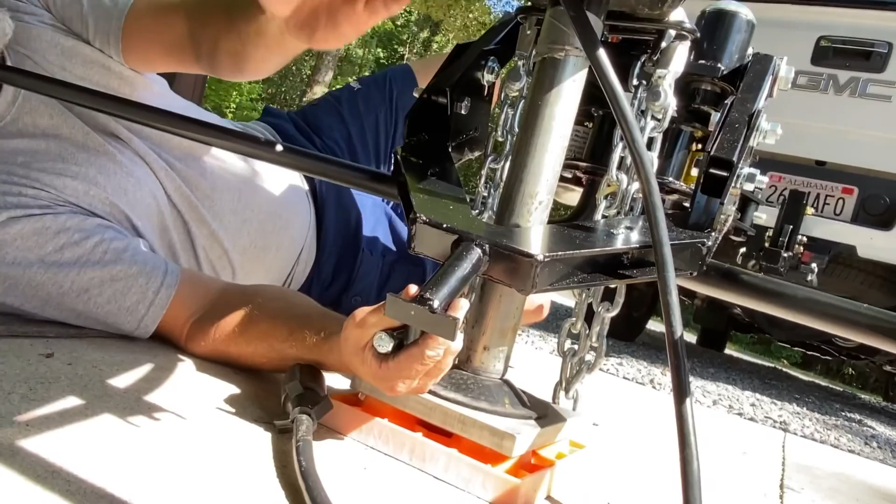Okay, so now we're going to put the yoke tail into the frame bracket here, and we've adjusted this frame bracket best we can with a tape measure, making sure it's kind of centered on the trailer. And now what we'll do is we just pick this guy up here. It should go up. Looks like we're going to have to move it forward some, which is okay. Yeah, we're going to need to pull that thing forward a little bit. Hold what you got.

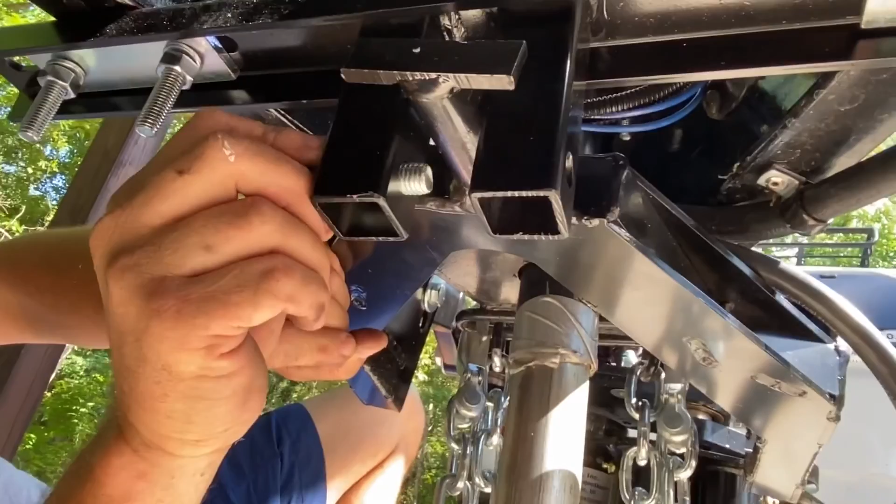Again, this is why we didn't firmly secure this guy in place until you have the yoke in place. It's because you know you're going to have to adjust it. So it goes in like that. And you've got a bolt along with a roller that it sits on, like so. And a nut that goes on this side here.

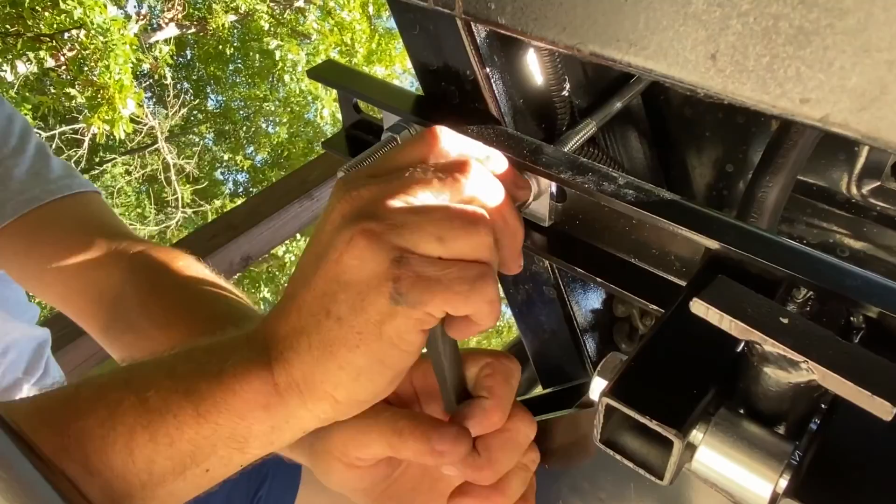And that keeps this yoke from moving back and forth, which prevents the hitch head from rotating on the ball. Right, now that we've got the frame bracket and yoke in place, we're going to tighten up the U-bolts that hold the frame bracket to the A-frame. They've got a torque spec too, and we'll torque those accordingly, but right now I'm just firming them up with a wrench so that they're good and tight.

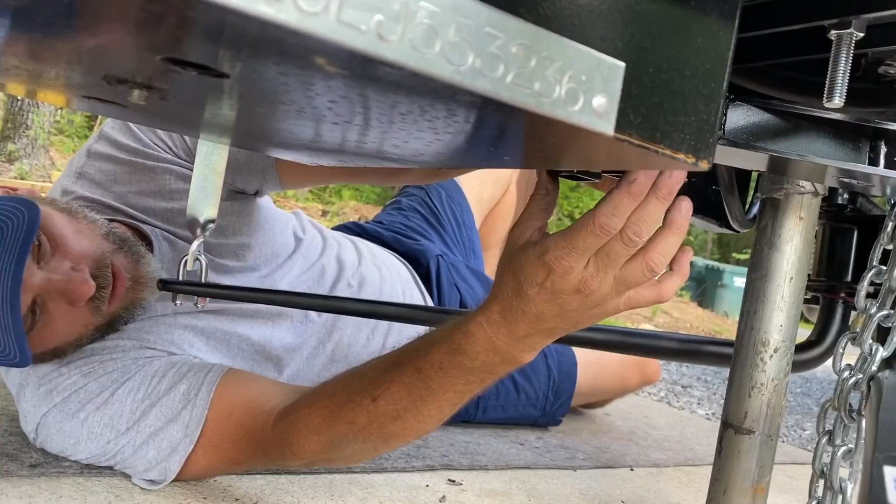All right, one thing I want to point out is on the frame bracket here where the yoke tail goes in, initially without this bolt tight, this thing would kind of rattle back and forth inside here. What you want to do is tighten this bolt up and kind of crush this in so that you can't hear it rattling just a fuzz. But you want it to where it doesn't move back and forth. Before it would move back and forth probably 1/8 of an inch. So by squeezing these in a little bit, it makes that tighter and helps secure that head from being able to pivot on the ball. It's got to be straighter, it moves too much.

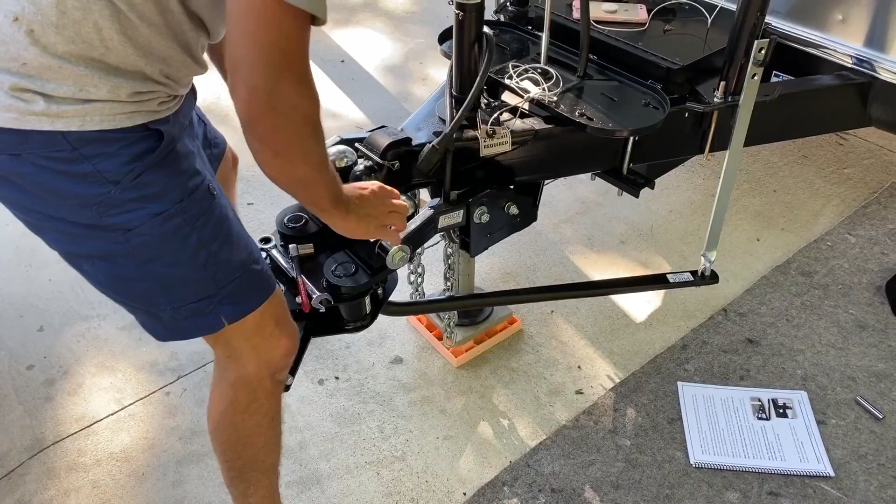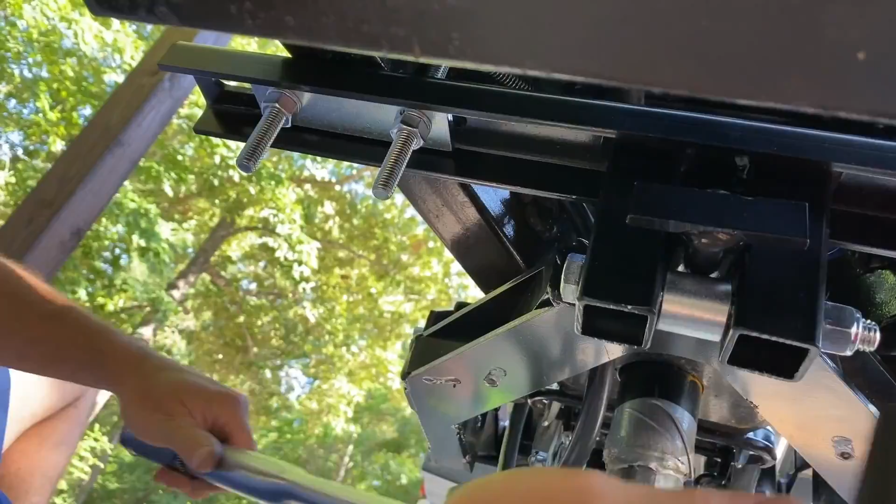All right, we're going to torque these bolts to 60 foot-pounds. Alright, so we'll tighten the U-bolts for the frame bracket to 55 foot-pounds. That's quite a bit of torque for... wow. So now we're going to torque these big 3/4 inch bolts for the yoke to 175 foot-pounds.

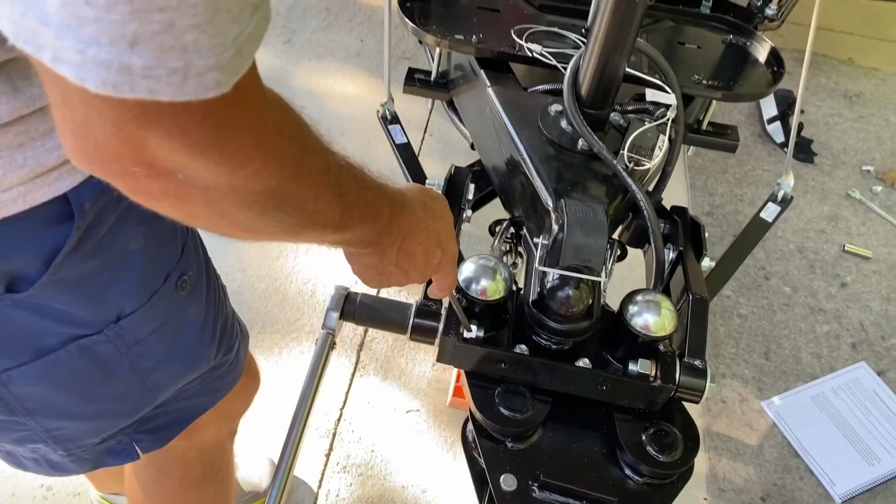Okay, so on one of these 3/4 inch bolts, the nut is spinning against the welded-in stop tab. So we're going to take a flathead screwdriver and swedge it between the stop tab and the nut. That should give us enough if we get it in there right. Should give us the ability to torque this thing. Close.

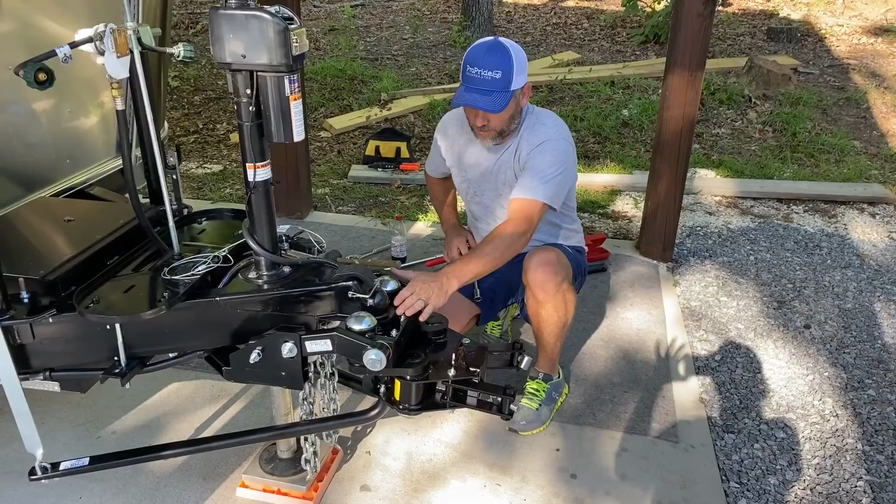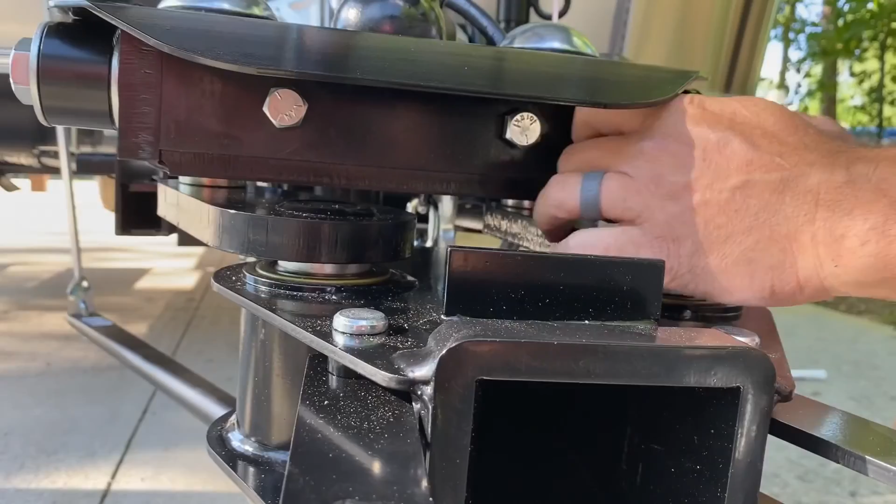There we go. All right, so now that we've got all this torqued, everything's all in position and done, we'll replace the hitch head cover. Just this piece goes like that. These 3/4 inch bolts hold it into place. In there. And just tighten it up in place here. And that should do it.

All right, 200 foot-pounds on the hitch. One more time.

All right, so that should do it for the install. All we've got to do now is hook the truck back to the trailer, get everything on some flat ground, and adjust our weight distribution.